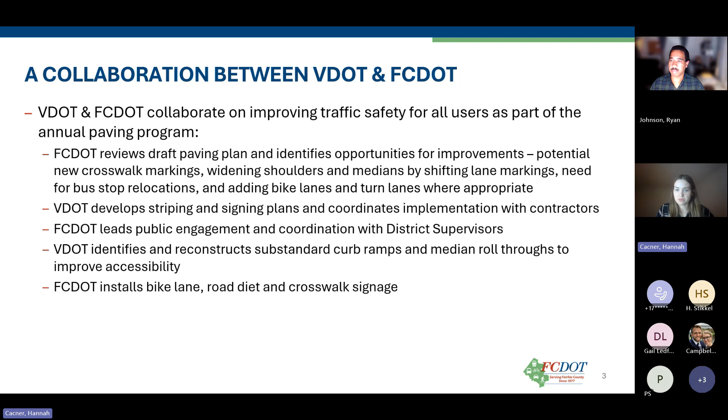And then from there, VDOT develops striping and signage plans for implementation right after each road is repaved. FCDOT leads public engagement efforts, and then once striping is complete, we'll install any bike lane and crosswalk signage.

As I mentioned, there have been some recent changes to this program. Typically, we hold the public meetings for any proposed bike lanes and crosswalks in the spring, right after VDOT publishes their annual repaving list. But after some discussions with VDOT over the summer, we decided that it would be better to hold the public meeting several months in advance of the 2026 repaving season, just to provide more time to create the striping plans for everything, for the bike lanes and for any project approvals.

So the proposed bike lanes and crosswalks that we'll be talking about tonight are on VDOT's draft repaving list. The final list will not be published until the spring of 2026, so it's very possible that some of these roadways will not end up on that final list. Typically, roadways that do not end up on the final paving list are just deferred for a year or two, so any approved new bike lanes or crosswalks would just be deferred as well, and then ultimately added once the road is eventually repaved.

Just a reminder that each of these projects is still fairly preliminary and subject to approval by VDOT, and whether or not each roadway ends up on the final repaving list.

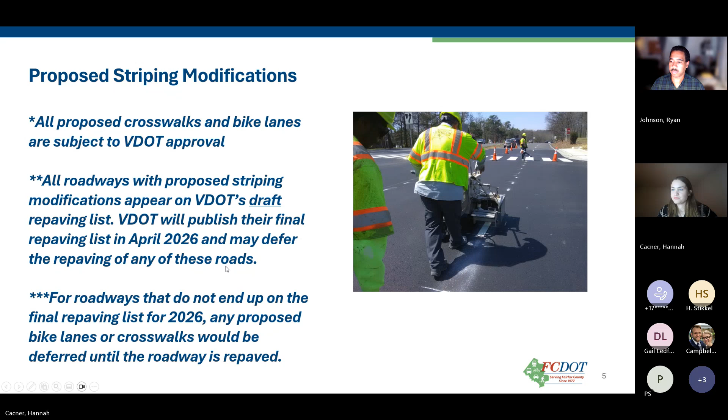Each year, FCDOT and VDOT add a number of new bike lanes through the repaving program. A big reason we do this is to repurpose underutilized roadway space. Many roadways in Fairfax County were built with much wider than necessary travel lanes, or too many travel lanes than are really needed, which can lead to safety issues like speeding or inattentive driving. Repaving gives us an opportunity to right-size those roadways by narrowing travel lanes and converting additional lanes into bike lanes or center turn lanes at relatively little cost. This also helps us implement our planned bicycle network, again at relatively little cost, because it's much less expensive to add new pavement markings when the roadway is already undergoing repaving.

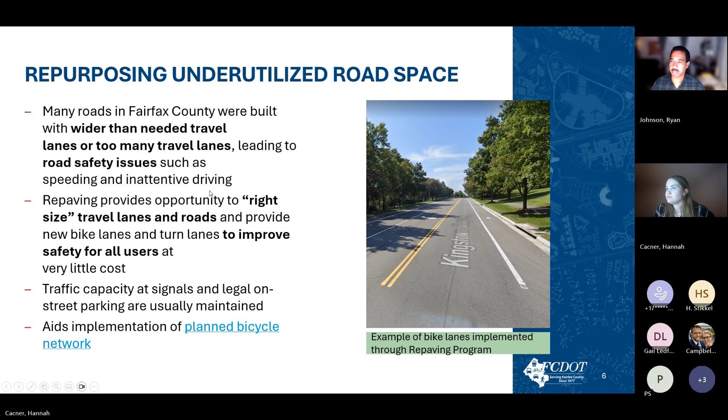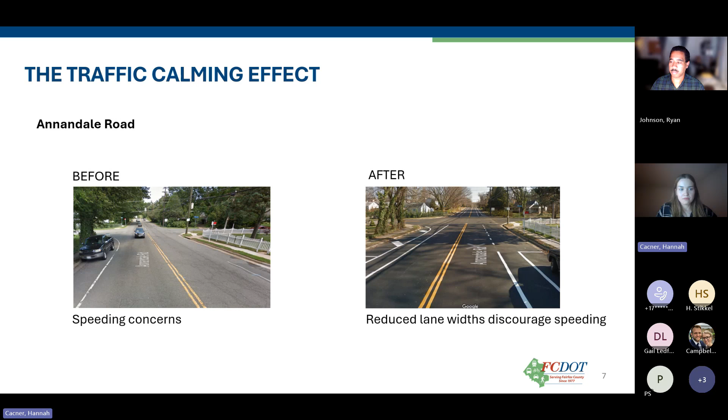This is an example of bike lanes added through the repaving program a few years back on Annandale Road. As you can see from the photo, you get a really nice traffic calming effect through adding those bike lanes. With that additional striping, drivers are given a visual cue that the roadway has been narrowed, which has been shown to slow down vehicles.

These are the three types of on-street bicycle facilities you'll see in Fairfax County that we're able to add through repaving. We don't usually add sharrows anymore, and we try to add buffered bike lanes wherever we have the width, just to give cyclists some additional separation between themselves and the vehicle lane. Although this program only allows us to stripe bike lanes, adding that buffer gives us the option in the future to add physical barriers, like flex posts or concrete barriers, through other funding sources.

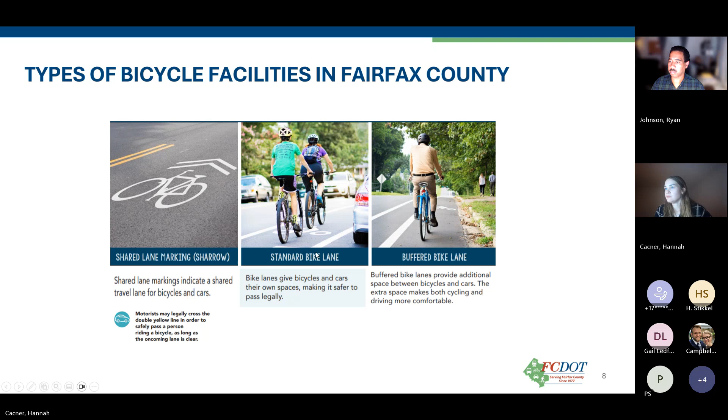This is just a little diagram of some of the benefits of bicycling infrastructure, showing that bike lanes provide a lot of safety benefits for all roadway users, not just cyclists.

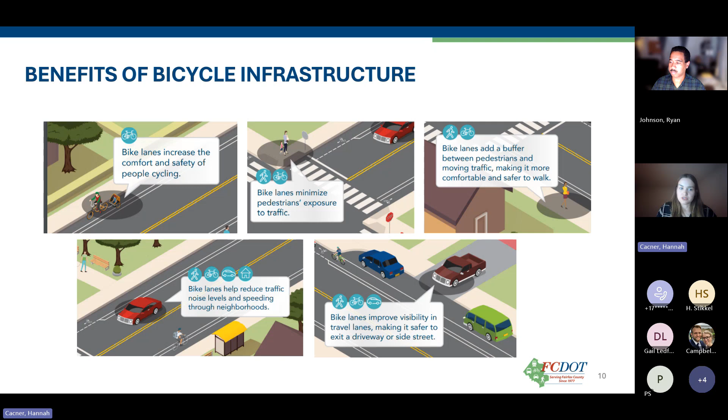Moving on to the first of our proposed striping projects, we are proposing to add bike lanes along Southgate Drive from South Kings Highway to just west of Richmond Highway by removing some underused street parking. These would provide a nice connection to the bike lanes planned to be added along with the future BRT project on Richmond Highway.

In order to add those bike lanes, we would need to remove about 60 parking spaces on each side of Southgate Drive. I'll also add that some of the parking along this road was recently removed in order to help with sight distance and other safety issues.

We do have a survey that will be open for two weeks following this meeting, which will provide you the opportunity to weigh in on all of these projects. I'll have a link to that survey at the end of the presentation.

For this roadway, you'll be able to choose in the survey between repaving the roadway as it is, keeping that parking there and not adding the bike lanes; or removing all the parking and adding bike lanes to each side of the roadway; or just adding a bike lane to one side of the roadway and preserving half of the street parking.

I definitely encourage everyone to take the survey and spread the word about it to others who might be interested, because the survey results will help Supervisor Lusk make an informed decision about which projects to move forward with this year.

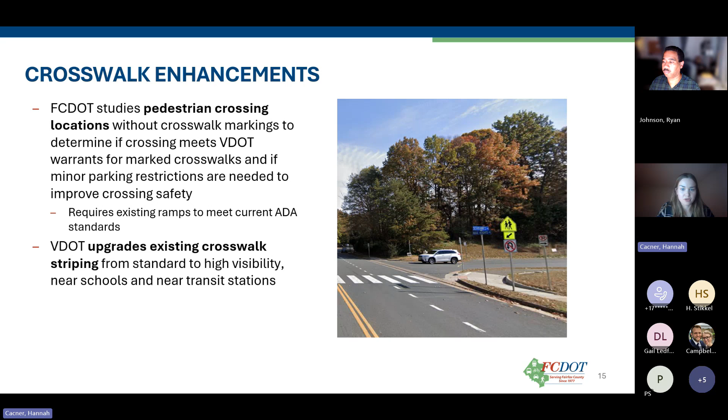Our proposed crosswalk location is crossing Hunter Village Drive at Jewelweed Court, not too far from the Gerry Connolly Cross County Trail. Unfortunately, there wasn't a ramp there in place, so we weren't able to add a crosswalk at the actual trail crossing, but this isn't too far from there.

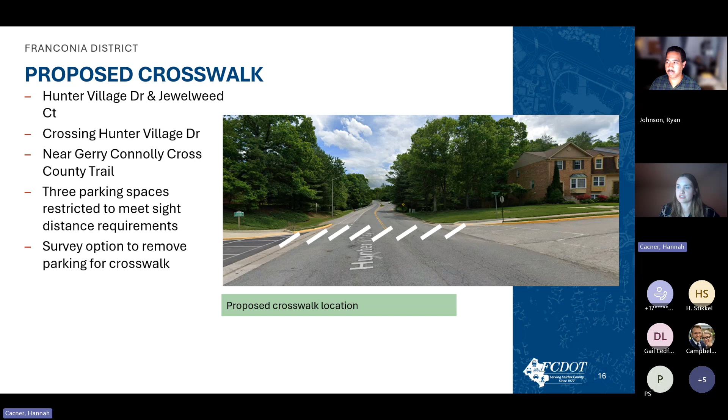We would need to restrict a few parking spaces to meet sight distance. Again, you'll just have the option to say yes or no to that in the survey, which we'll talk more about at the end of the presentation.

This is an aerial image showing where the crosswalk would go, and this yellow line right here just shows the 3 parking spaces that would have to be restricted to meet the sight distance requirements.

That just about wraps up my presentation for the evening. But before we move on to the Q&A portion of the meeting, I just wanted to make a couple of notes on community feedback. If you have any comments related to paving, drainage issues, missing signage, signal repair, walkway repair, or any sight distance issues related to vegetation overgrowth, those should all be submitted to VDOT, and they have the resources to handle those.

You can do that by following this link to the My VDOT portal. And if you need to request any roadway repairs, such as fixing a pothole, you can follow the I Need a Road Repaired link on the VDOT portal, or call 1-800-FOR-ROAD.

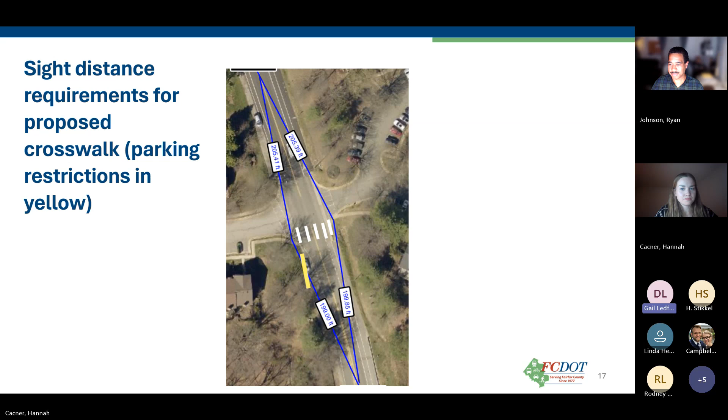Thank you very much, we look forward to getting this new crosswalk. This particular section of Hunter Village Drive near Wintercrest leads up to our community center, our pool. We have a sports court there too, so there's a lot of pedestrian traffic on Hunter Village Drive crossing over to that west side to get to those amenities of ours. So this is very much appreciated.

Great, yes, glad to hear it. Sounds like it'll be well used if it gets approved and goes in. So thank you so much. Thank you, Linda, for your support. Please feel free to share out the link to the survey to get more people to fill it out too.

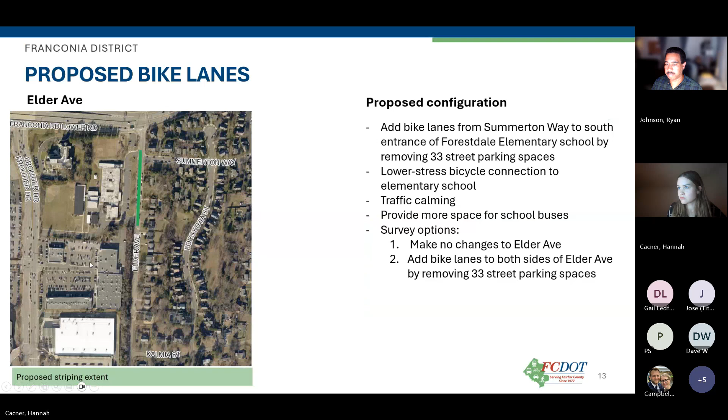In this survey, we'll have the option to do either bike lanes on both sides, no bike lanes at all, or just bike lanes on one side of the road. So it will depend on the community feedback. Depending on how people respond, if people feel that they want to keep one of the parking bays, we can just add a bike lane to one side of the roadway. The link to the survey is at the end.

If the bike lanes would be on one side, would they be bi-directional versus going with the flow of traffic, or making it both sides? No, if they're just on one side, we'd only have space to do them on one side. So we would add them to the westbound side just because that would preserve more parking spaces.

Okay, thank you. This is Lori Cruz. Good evening. I want to piggyback off what the other lady just said, that adding bike lanes, you have to take into consideration what's going to happen with those vehicles parked alongside. So question number one is, are you guys considering adding bike lanes throughout the Groveton community to help the traffic flow, or what made you pick Southgate Drive in particular to add bike lanes? Because if we're looking for community engagement, this is going to depend on who fills out that survey. Alongside Southgate, a lot of that is commercial, and a lot of the folks live in the apartment community. So I'm interested to know what made you pick Southgate Drive to add bike lanes.

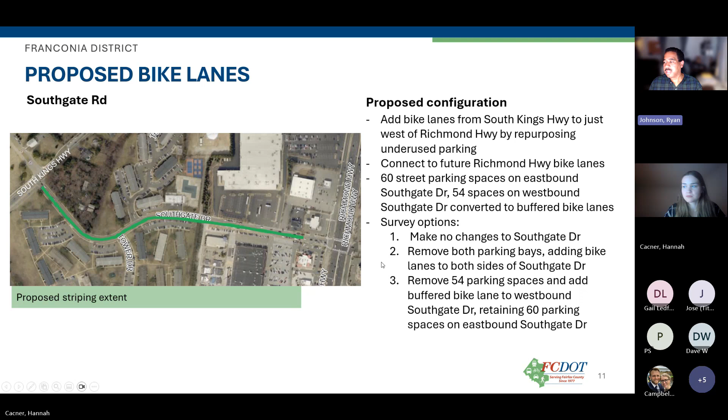Thank you. Those are definitely things we would want you to share through the survey. So feel free to leave those comments on the survey, and share the survey as much as you can with your fellow community members to get them to speak their comments and questions too.

So thank y'all, I appreciate y'all. Thank you. Thank you.

Any last questions before we wrap up? Oh yes, Supervisor Lusk, go ahead, if you'd like to make any closing remarks.

Yeah, I just wanted to say on this issue with Southgate, we can certainly take an additional look at the issue and work with the police department to try to address some of the concerns we've just heard here. We're aware of the commercial vehicles - it's a problem pretty much up and down the corridor - but we clearly heard the comments that were just made and recognize there are some unique challenges. We'll weigh that with the comments we receive in this survey, but we'll also do some additional work with the Mount Vernon District Police Station on this issue as well.